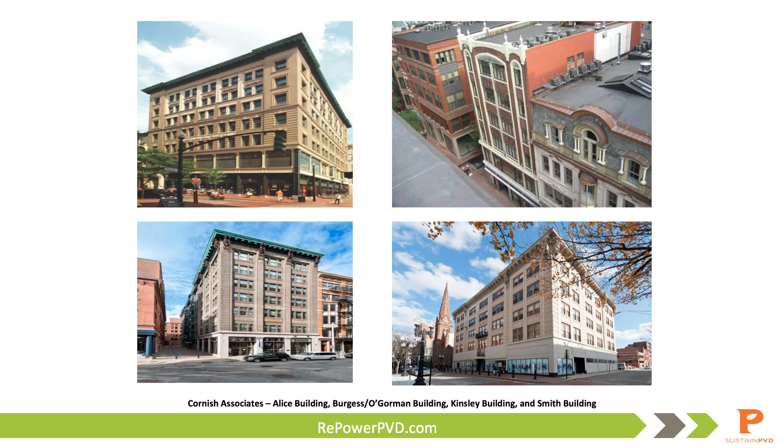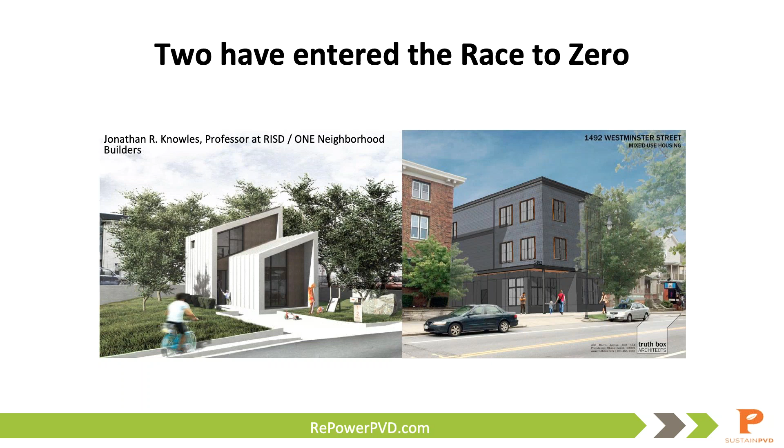So far, there are 2 participants who have entered the Race to Zero track of the challenge. One is Jonathan Knowles, professor at RISD, and the second is Truth Box, whose founder is Peter Case.

I also wanted to share that last year we worked with various stakeholders and co-created a draft ordinance called the Building Energy Reporting Ordinance, otherwise known as BERO. We plan to introduce this ordinance in the first quarter of next year. If approved, it will require all owners of buildings equal to or greater than 10,000 square feet to benchmark their energy and water use, using EPA's Energy Star Portfolio Manager tool, and then submit that data to the city of Providence. After that, the city will publish all of that information on its website.

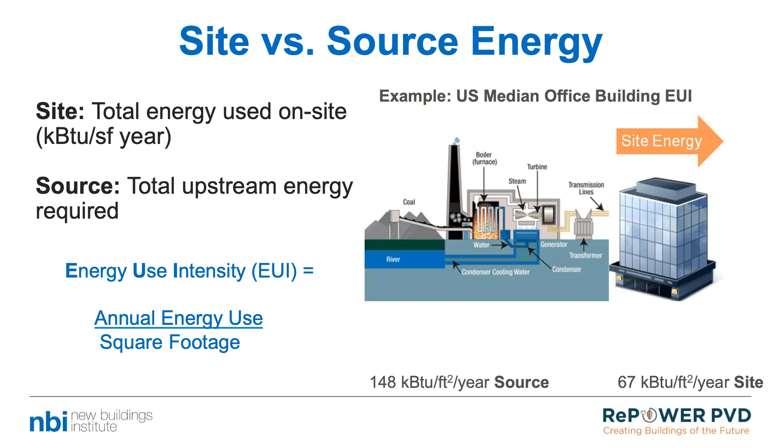But I think it's useful to think of zero energy in just more basic and general terms. A zero energy building is an ultra-efficient building that generates as much energy as it consumes on a net annual basis. A simple way to think about it. And you can get into the specifics when you're actually trying to reach a goal for someone else.

So if you want to reach the goals in Providence, you heard how they were defining that - a simple site zero energy requirement. But if you're seeking zero energy from a different certification, like living building or somewhere else, it's important to pay attention to how they're actually defining zero energy.

So with that basic understanding, I think it's a good idea for us to look at the growth of zero energy, because zero energy has moved from being just the bleeding edge of technology and building construction to really approaching almost a new normal. It's in the mainstream now. It's very achievable, achievable with off-the-shelf components, and we can see the growth just since 2012.

NBI has a report we put out called the Getting to Zero status report, and we've been putting it out about every two years, and you can see the growth in what we've found around the country. We're seeing zero energy buildings in every part of the country. There are just a couple of states that don't have them all, but it's important to notice this is not something that's geographically limited to a few places, and especially not limited to only a few climate zones.

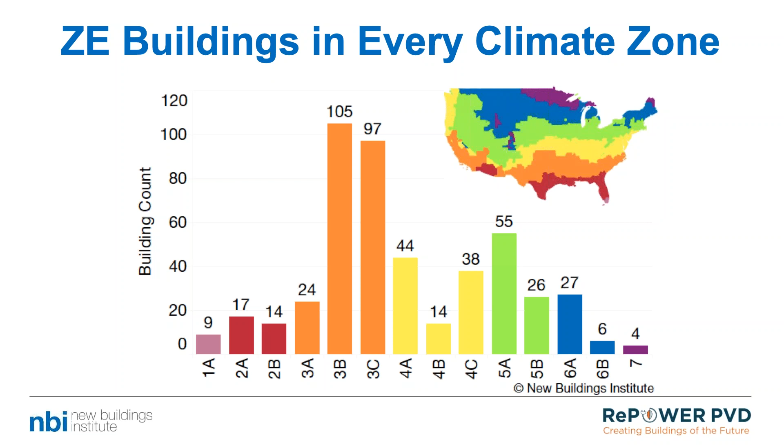We see that we have zero energy buildings in all of the climate zones in the continental United States, even climate zone 7, our most extreme cold, and climate zone 1, our most extreme hot climates. So we have examples of zero energy buildings being achieved in every climate in the country.

And not only that, we're seeing it happen under every kind of ownership type. In the very beginning, we saw zero energy buildings were kind of limited to owner-occupied buildings, where all of those details of how you do building construction and operation are simpler. But now we're seeing that zero energy is being achieved in all kinds of buildings. Of course, private for-profit is still the biggest sector, but public buildings - whether that's county, city, state, or federal - we're also seeing private nonprofit and private multifamily.

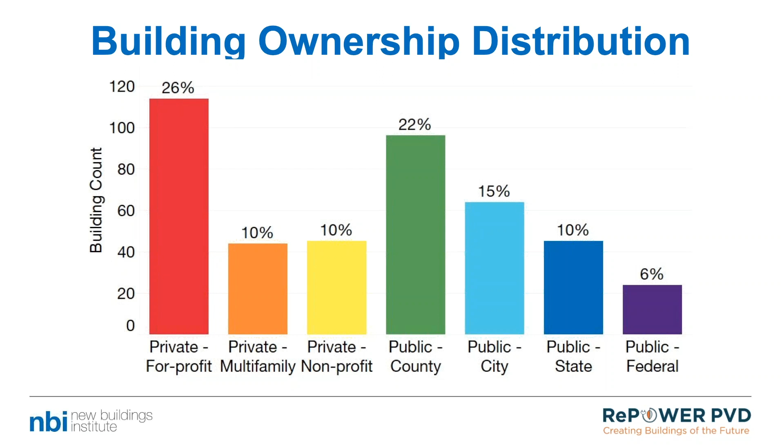There was a time when a lot of people thought that multifamily was not going to be a building type that we could get to zero energy, but it's actually one of the fastest growing building types today. And we're seeing it in lots of different sizes of buildings.

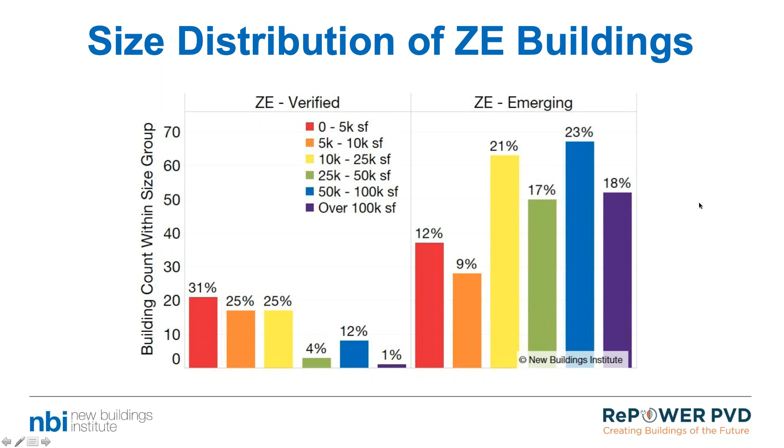Now, when you're thinking about that consumption side of zero energy, remember zero energy is where you balance consumption with on-site renewable production. So you have to bring down that consumption first.

If we're going to compare the typical consumption of a zero energy building, because we've looked at a whole lot of them in our Getting to Zero status report, what we're seeing is that it still requires a pretty big reduction from where the codes are. The codes really aren't close to the level of performance that you need for zero energy.

And to a certain extent, that really makes sense. If you think about it, the code defines the worst building that you can legally make. So zero energy is really a higher standard of building our buildings.

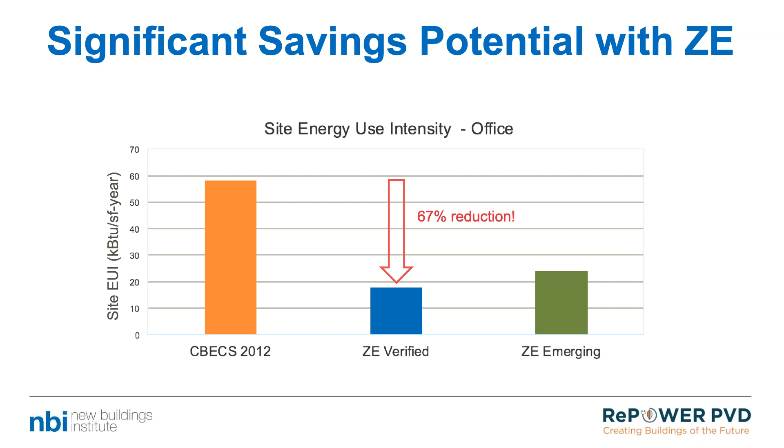So a 67% reduction, just in this example for office—if you look at this chart, it's not from codes, it's actually from the average performance of an office building from CBECS, the Commercial Buildings Energy Consumption Survey from the EIA. So we're seeing a real performance premium over your typical average building.

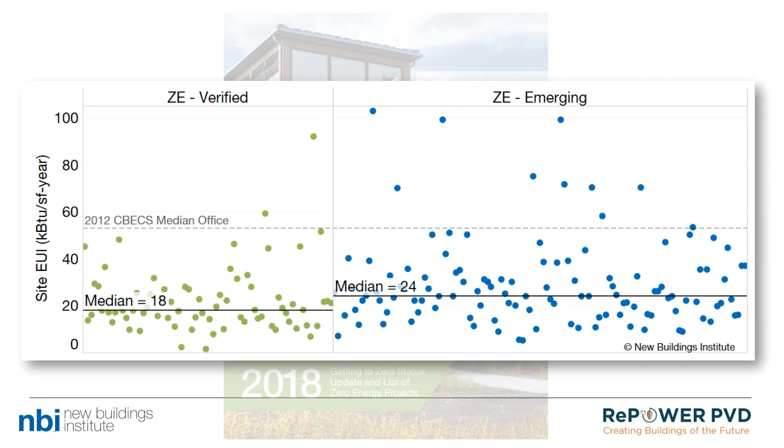So as you're taking on projects, this gives you a rough idea of where to begin. And just for reference, I talked about code a moment ago. The 2018 IECC—Rhode Island is an IECC state—delivers, on average, an EUI somewhere around 50. So there is still a long way to go, even in new construction.

And of course, we like to show and talk about what are the projects that are leading the way. Schools are really a big leader in zero energy. I talked about how multifamily is the fastest growth, but really it has been schools for quite a while now, and schools are the ones where we're seeing the greatest penetration in zero energy buildings. That makes a lot of sense when you think about it, because schools have budgets and they need to keep their operating costs under control, not just their construction costs. So there's an automatic incentivization to think about what are going to be the life cycle costs of those buildings.

So let's ask the question of why you might pursue a path to zero, because the energy is, of course, an obvious reason, but there are also a lot of non-energy benefits to high performance buildings.

Now, this is that classic 3-30-300 breakdown: if your energy costs for a building, say an office building, are about $3 per square foot, your rent might be around $30 per square foot, but for a building that's in use, your salaries and operations are going to be more like $300 per square foot. So we see energy, rent, and payroll.

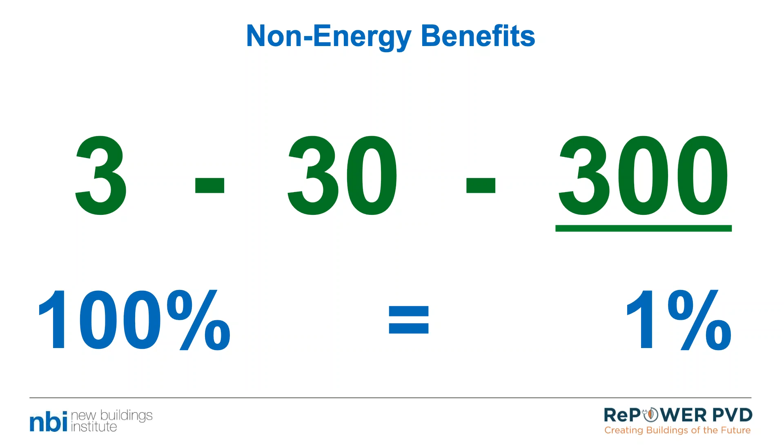And so the energy cost in a building can really be dwarfed by what a business is paying the people who are in the building. So you could reduce 100% of your energy costs, and that would only be equivalent to making a 1% savings in your payroll costs—which is one of the reasons it makes a lot of sense to look at the non-energy benefits of high performance buildings, because they have impact not just on the energy costs, but also on the people.

This chart takes a look at some of those economic impacts, looking beyond what just energy and energy efficiency does. Go ahead and take a look at it—it actually comes from where NBI is located, Oregon.

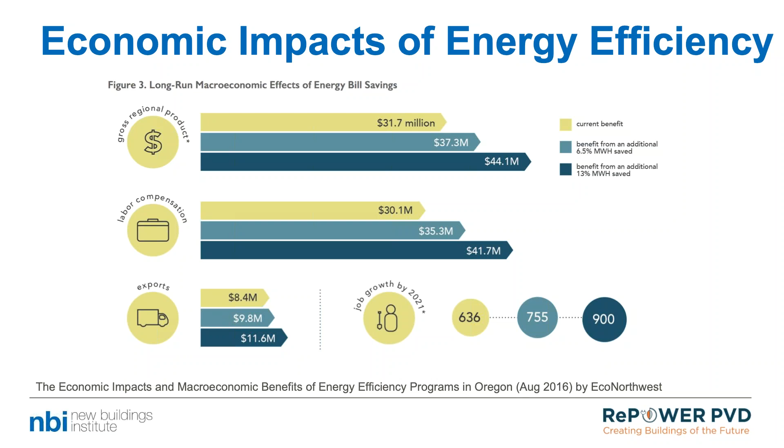There's a lot of information here, but the key takeaway is that with an increase in energy efficiency adoption, we see more energy efficient products—lamps, panels—being produced, bought, and installed. And that has a real economic benefit to the locality.

But we were talking about the payroll and that impact on the actual building itself. In high performance buildings, we've seen not just reductions in energy, but also improvements in occupant well-being, satisfaction, and—most importantly for economics—productivity. So there is a financial benefit: you can get more productivity out of healthier and happier occupants, which can have a much larger economic impact on a building than just the energy savings.

So how do those health benefits really shake out?

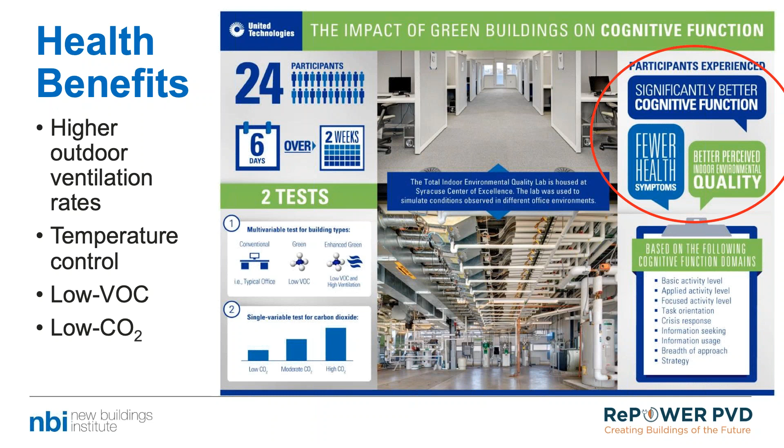With better ventilation rates, better temperature controls, and better control of VOCs and CO2, you see lower absenteeism, better attention to detail, and even higher cognitive ability, especially as CO2 levels are dropped down. Many studies have shown that these impacts affect especially office workers.

So we see there is a benefit to the environment of going green, but companies can also save money by occupying green buildings. Employees generally prefer green buildings, and even a building's asset value can increase the greener and healthier it is. This is something we've seen consistently, studied in LEED buildings, that the actual valuation of buildings is impacted by whether or not it has these green certifications.

So I mentioned schools before, how schools are leading the way. I'd like to talk briefly about why you would want to go to zero energy in schools specifically. There's cost avoidance from utility bills to the classroom, an ongoing cost savings to the school owner, usually the school district.

It's a more comfortable and productive environment for teachers and students. If you think about it, a school's job is to educate the students, and this actually makes the school better able to do its job, to serve the purpose for which it was built. By building inefficient schools without the same kind of indoor environmental quality, we're actually building an asset that doesn't do what it's intended to do as well.

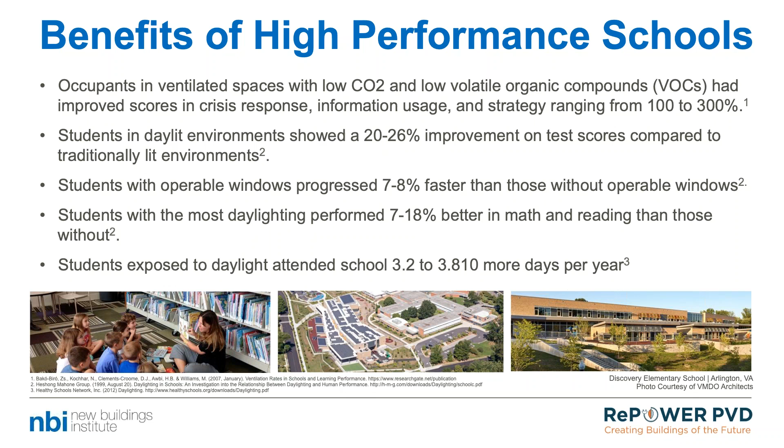So for those of you who are my age, during the era when they were getting rid of windows in schools because they were quote-unquote distracting—these schools that have view windows and access to daylight and views, these hallmarks of high performance schools, are actually resulting in better test score performance out of students.

So by having healthy schools, we can actually have a real impact on the overall health of our childhood population.

So we've talked about zero energy in general, zero energy buildings and their characteristics, and other benefits. So how do you get there? What we found by looking at buildings is that there are a lot of ways to get to zero energy buildings, but a few common strategies and technologies keep popping up.

They keep being part of that successful mix. What we're seeing is stakeholder awareness, especially when dealing with public projects, and team selection that is cognizant of making sure the team has the right skills to get to zero. A good integrated design and pre-design process so that zero is integrated from the beginning, and energy concerns are brought forward in the design process so they can be effectively handled.

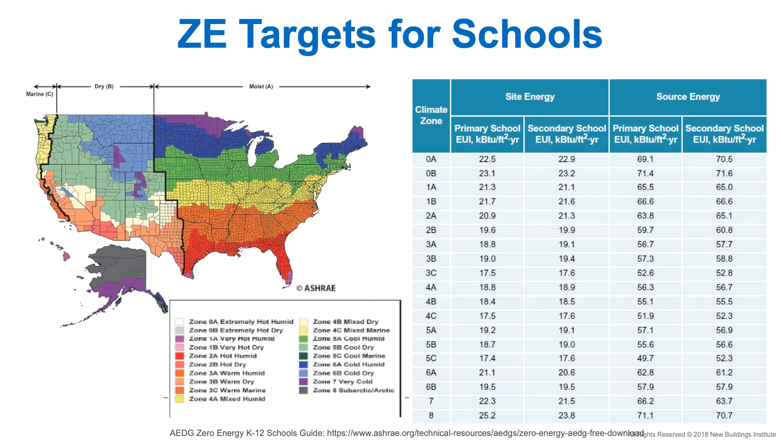Now I wanted to talk about existing buildings specifically, because building prioritization is one of the strategies I mentioned before. If you are looking to get to deep energy savings in existing buildings, or even going all the way to zero, you really have a process you need to follow. That starts with benchmarking, what Dilip was talking about. In Providence, they're doing this on a voluntary basis now, looking to make it required in the future. That's an essential part—you have to understand where the building's performance is.

There are lots of useful tools out there. You can use just your energy bills that come from the local utility, and you can use tools like Energy Star Portfolio Manager—you might as well get used to it now—or other online data tracking tools to see how the building is actually performing now.

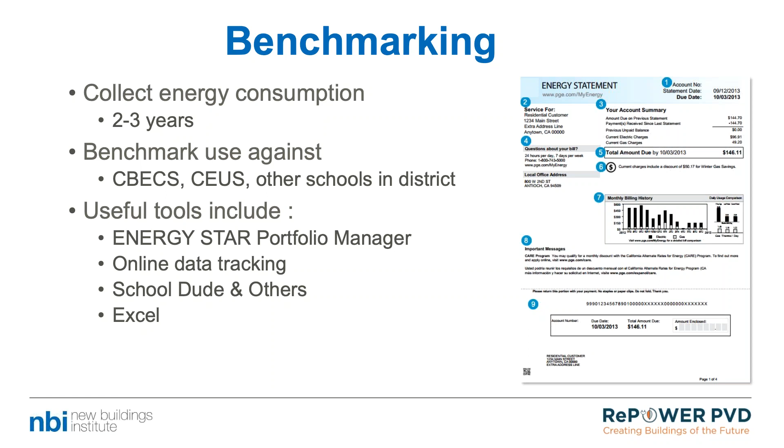But if you want to see if this building is a good candidate for zero energy, it takes more than just understanding where it is. It takes an understanding of why it's where it is. That depends on investment and assessment—looking at the building's physical characteristics. What is its envelope like? What is its structural system like? What is its electrical system like? Identify not just the weaknesses, but also the strengths in these existing systems.

It takes looking at the site itself so you can see if there are opportunities. Your climate is not just a negative, it can be a positive. Are there natural ventilation opportunities? Are there natural daylighting or passive solar opportunities? And of course, talking to the people who use the buildings themselves—not just the facilities managers and operators, but also the occupants, so you can understand how it's actually operating day to day.

When you're thinking about whether a building is a good candidate for going from where it is to zero energy, I think it makes sense to think about the way a building exists—this isn't a new building, we're not just starting from scratch. There are really opportunities in a building's life. Every building has a life cycle, and those life cycles provide opportunities to make energy efficiency improvements, including going all the way to zero energy.

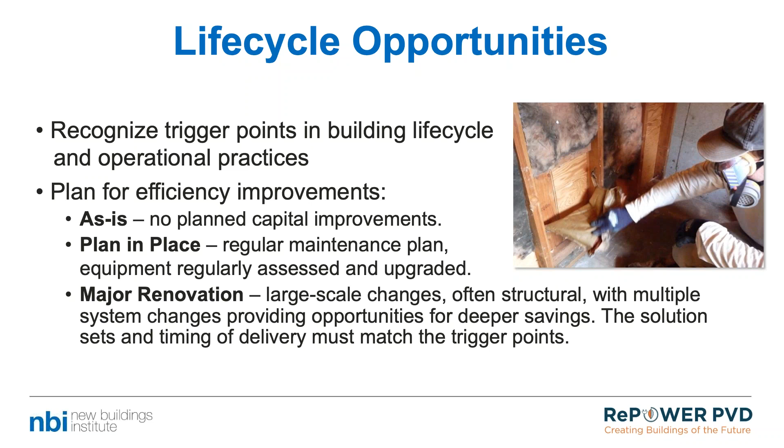And that requires having a plan—looking at whether you're just going to leave it as is, and sometimes that makes the most sense because the time isn't right. You can plan in place, making general improvements to it as is, so that as the building goes through its natural life cycle, you can address things as they come up. Or you can take a more serious approach, a major renovation, where you make large scale changes all at once, providing a real opportunity to make significant changes. And I like to look at it this way.

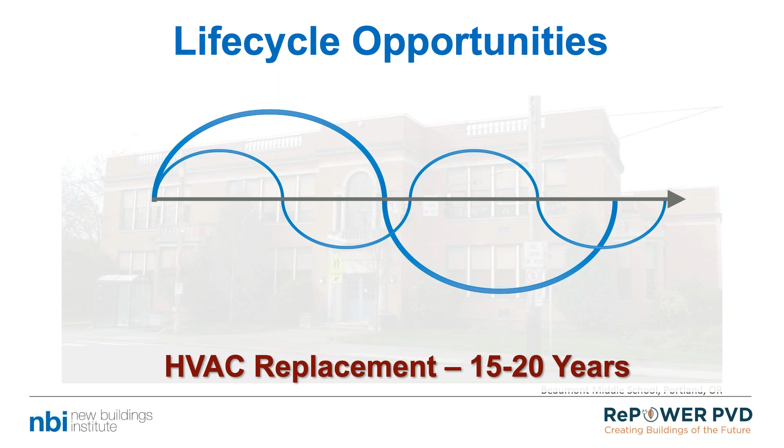You get that major renovation chance maybe every 30 to 50 years. But more often you're going to get an HVAC replacement - that happens every 15 to 20 years, and that's a major opportunity to make changes in the building. Your lighting retrofit might be every 5 to 7 years in an office. In an office, your lease renewal might be every 2 to 5 years, and that's another opportunity to make energy efficiency improvements.

And of course, real estate transactions. One of the reasons real estate transactions create such an opportunity is because that's when money is involved. There's refinancing, there's mortgages. These kinds of transactions create an opportunity to bring capital in to make these improvements. And that could include smaller transactions, whether like the leases we talked about before, or refinancing.

Part of looking at these economics, with zero energy, is really taking the total life cycle costs of owning and operating a building and moving them forward. The utility costs you would have paid over time - you're avoiding some of that by building a better building up front. High performance buildings have been found to have lower maintenance and repair costs, so that ongoing maintenance and repair, you're avoiding some of that later on. All buildings need some maintenance at least, and by building better value up front...

If you think of a zero energy building in terms of the net present value of all these characteristics you're creating in a building, that justifies any additional cost there might be for going to high performance. It makes that incremental cost analysis work better.

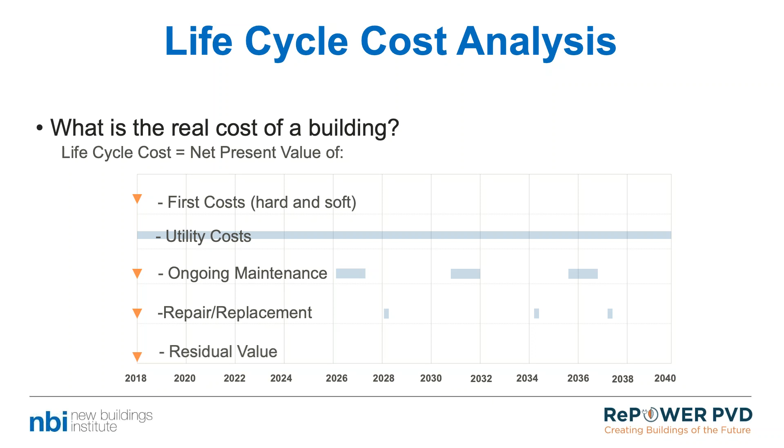So we've talked about existing buildings, that assessment and thinking about how you get in there. Now we'd like to talk about how you move forward with your design process. We mentioned early on that one of those strategies was the integrated design process. There are formal integrated design processes out there, but we want to talk about it more generally, whether or not you're following one of those formal processes - what you want to do is bring that expertise into the project early. One great way to do that is with a zero energy design charrette.

Of course, getting everyone to agree on the energy target and sustainability goals, get everyone to buy in, and then brainstorm the potential technologies and strategies to achieve the target. One of the reasons you want to bring this team together early on is so you can identify pitfalls that are oftentimes not identified until later.

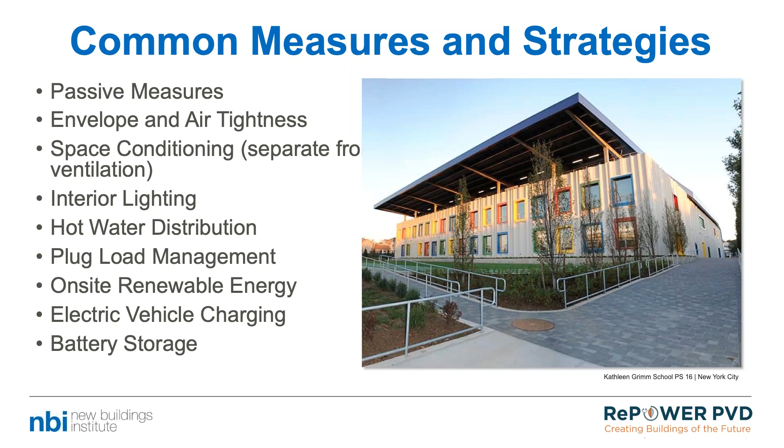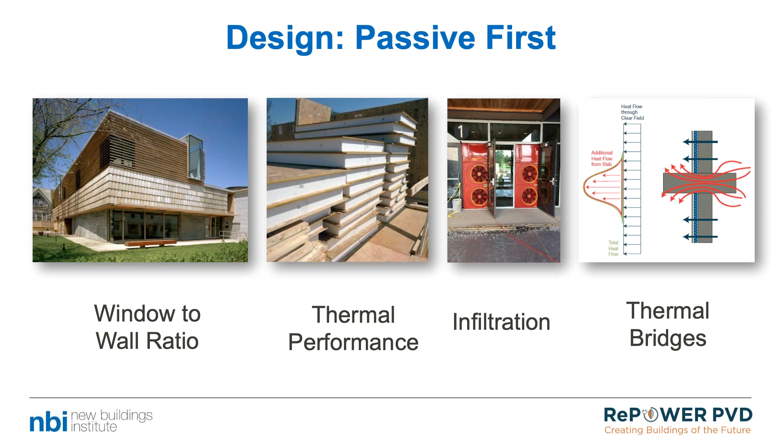So when we look at passive first, we're really talking about a high performance envelope, and that includes things like window to wall ratio, the thermal performance of the materials themselves—both insulation and windows. Taking care of infiltration and reducing infiltration levels, which is also key to indoor environmental quality. And then also addressing something that is often under-addressed, which is thermal bridges—these high conductive materials that pass through the envelope that act as a shortcut for heat to get in and out of the buildings.

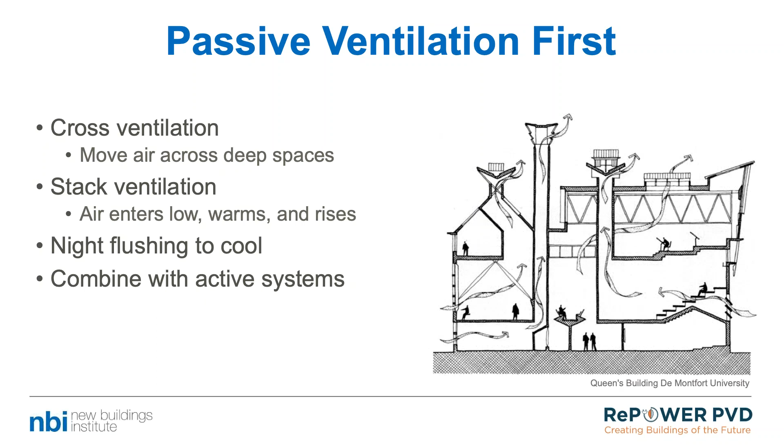But it can also mean more sophisticated approaches like passive ventilation, looking at the opportunities for cross ventilation, where air moves across the space, or stack ventilation, where cool air comes in low, and as it heats, it exits high. I think one of the big ones is really night flushing, because that is a real opportunity to cool down buildings before the day even starts. And these can be integrated with active systems so that you don't have to go all the way to natural ventilation all the time.

Looking at your shading opportunities, to reduce the amount of solar gains that get in, to reflect the light around so that you're just getting the daylighting and you're not getting as much of those solar gains through the windows that you have. That's kind of always the mixed bag about windows—yes, you let in the light and you've got daylighting, but you're also letting the heat in and out of the buildings.

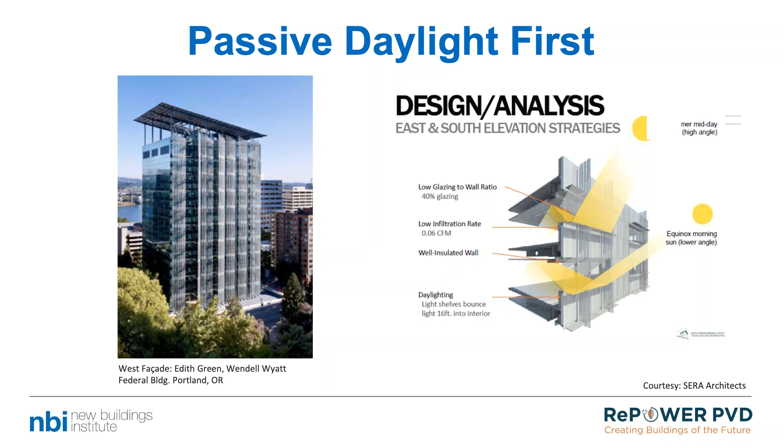Daylighting is really a big one, and that's one that should be part of every high performance building—designing your windows so that they effectively bring lighting into buildings. And even now, even with higher efficiency lighting technologies, lighting is still a major use, especially in office environments. Of course, daylighting allows you to reduce or eliminate the electric lighting that you use in the space.

But at the same time, you have to be cognizant that a good daylighting design is going to have impact on the spaces and how they're laid out. It's going to mean less walls. You may not have those private offices all around the perimeter of your office building, and it has to be controlled. Lots of windows doesn't mean that you have a daylit building.

A daylit building has carefully selected windows that let in enough light, but don't let in too much light so that you don't get glare, but also let in light in a way that penetrates the building as deeply as possible, using things like light shelves, exterior shades, and interior shades. And of course, even surface color and texture has an impact on daylighting, so having highly effective daylighting systems can have an impact on the aesthetics that you choose for the building.

So moving beyond passive, we talked about interior lighting, and we're really to the point now where LED is the way to go. The color quality is there. They can look like standard light fixtures, and they also provide some interesting opportunities to design atypical lighting, which can be a benefit in and of itself.

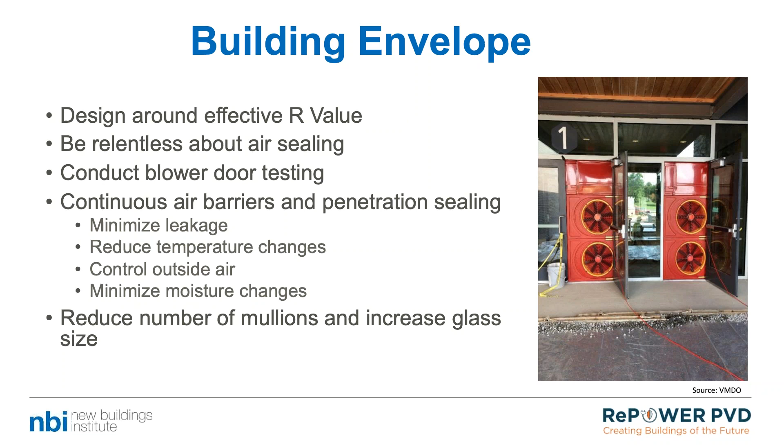That's one of the ways that you get a higher performing glass fenestration system. But of course, the other part of that is the space conditioning. You really have to look at high efficiency systems, but more than just high efficiency systems.

What the system is rated at is of course really important, but there are some system types that are just more efficient than others. So look at selecting those types like VRF, like high performance multi and mini split systems, like ground source heat pumps, like radiant systems. These systems are frequently found in zero energy buildings because they are more effective at conditioning the space for the amount of energy than other systems, even when they have the same efficiency rating.

But then, looking beyond just the space conditioning and looking at ventilation and the opportunities to do heat recovery. Of course, air tightness is a part of this, because part of sizing your HVAC system is accounting for the loss through infiltration. If you have VAV, looking at AC just for dehumidification.

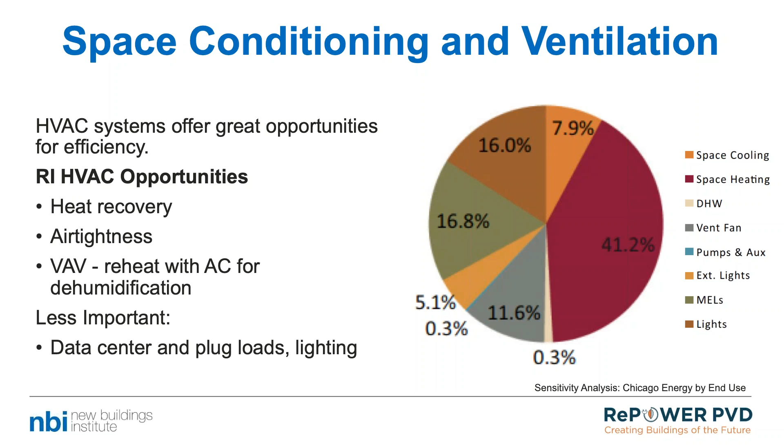And then, of course, the impact of things like data centers and plug loads and lighting, because if you can actually bring those down, you can bring down your space conditioning loads as well. But one of the things that we're seeing in a lot of these buildings is high performance ventilation.

Now, one of the really big examples of this is decoupling ventilation and space conditioning. So a dedicated outdoor air system can provide the ventilation all on its own. Most HVAC systems that are sized for space conditioning are oversized for ventilation. And so when they're only providing ventilation, they're actually doing it very inefficiently.

And so there's the opportunity to decouple the two so that you can have ventilation being very efficiently provided, separate from the space conditioning system.

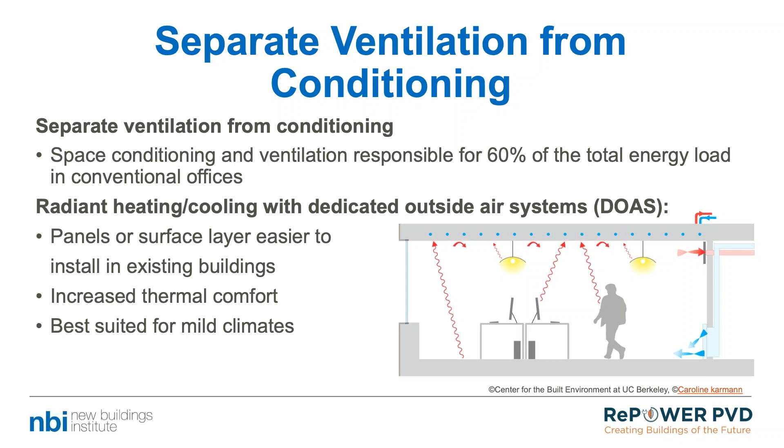And of course, this is a natural link with approaches like VRF that we talked about, or what you see here, the radiant heating and cooling, which is a great application of DOAS, where the radiant panels are a very easy way to get radiant heating and cooling into a space. They can improve thermal comfort, and they're really well suited for mild climates, but they also work in more extreme climates as well.

Now, looking beyond space conditioning, there's the other kind of equipment, which is your hot water production. Now, in a lot of commercial buildings, this is usually either a very small load or a very large load, because there's a big process load or because it's a multifamily building.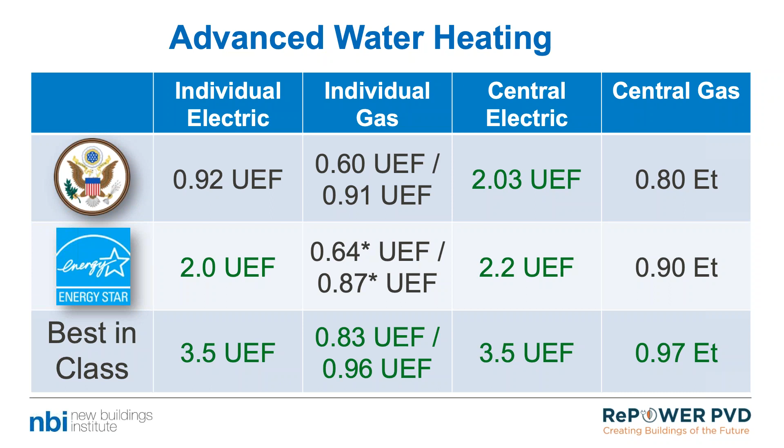And you can see how far Energy Star is beyond these code minimums that are set at the federal level. But even the best in class goes quite a bit beyond that. So there's big advances that can be made.

And of course, this is a great example of where your local utility, and this is something that I want to highlight in general, is that your local utility, this is an example of National Grid, can really help with these sorts of technologies and getting them into your building. So not just for water heaters, but on all kinds of equipment that goes into the building, and even technical assistance.

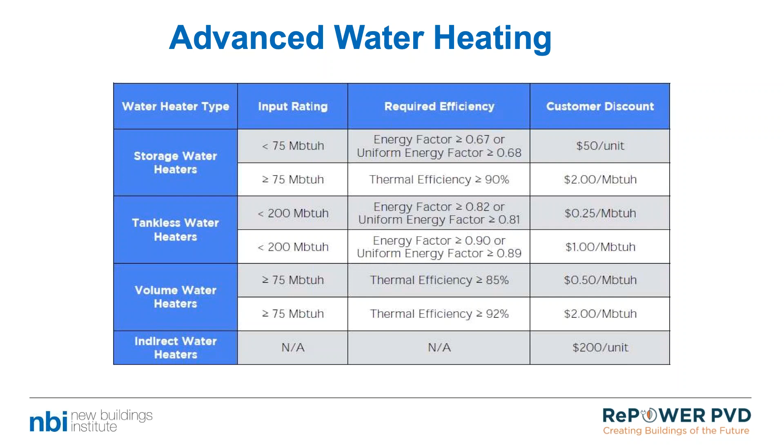And we talked a little bit about controls and about how important it is for it to be very user-friendly, very intuitive. But we also have to have that local control, and you need to have the consistency. The usability of controls is one of the most important things. And that can be achieved at a very high level with sophisticated building automated systems, BAS systems, EMS systems that can really tightly integrate everything.

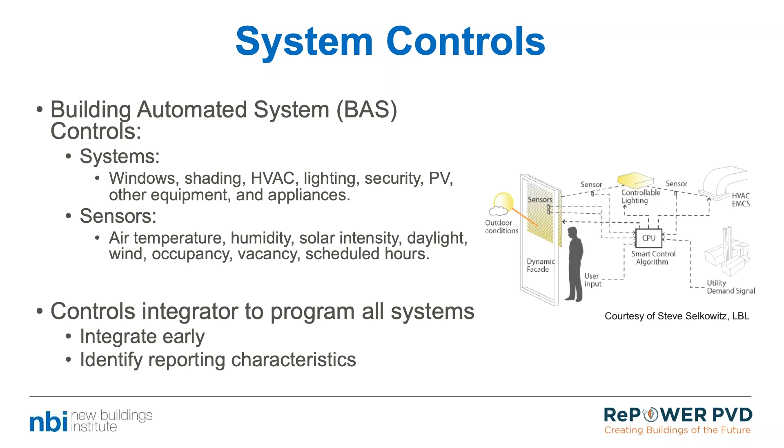And when you have a larger building, that can be a really effective way to make sure that all of the systems are working well together. But controls go beyond just the equipment.

That is also an important way to address plug loads. As we bring down all of those other loads in a building, plug loads are becoming larger and larger, so that in a lot of zero energy buildings, plug loads can be as much as 50% of the total energy use. So there are opportunities to bring down those loads by actually controlling the receptacles that non-essential plug loads are plugged into. There's also the opportunity through equipment selection, policies, and the ongoing operations of the building to bring down the amount of loads brought into the building to start with.

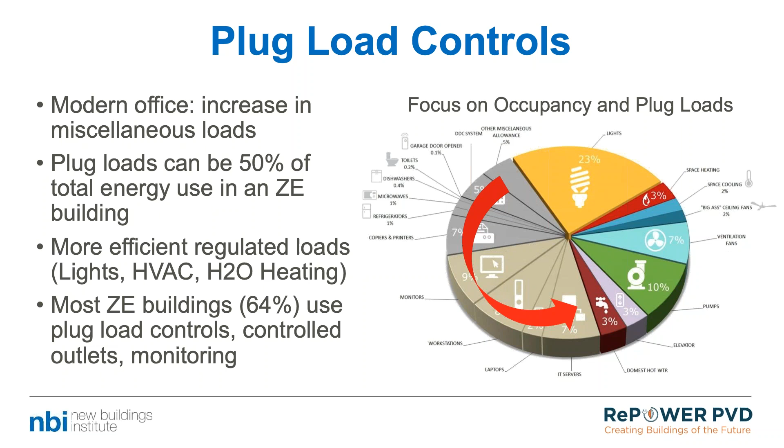So that's one of those important things about bridging to operations. Plug loads are one of the most essential places where that needs to happen. Which gets us to operations in general: you need a feedback mechanism to the operators and occupants so they can see how the building's doing, see the impacts of their behaviors, and make adjustments, so you can foster a little competition and goal-seeking. That feedback to the occupants is a really important part of getting to zero.

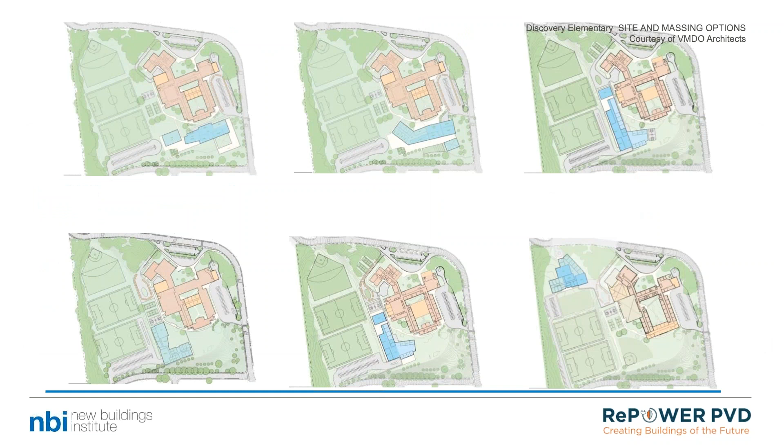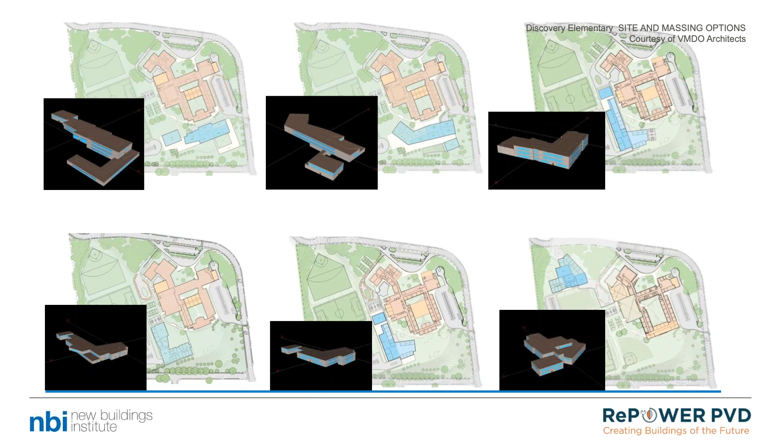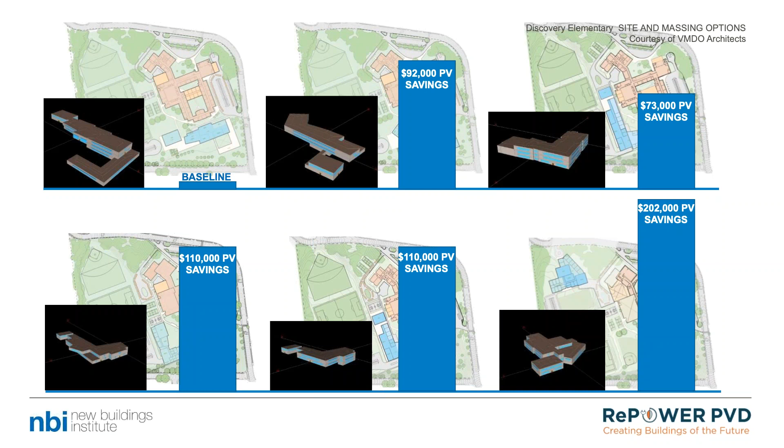I wanted to talk briefly about the impact of consumption on renewable production. Here is a school design where they looked at different ways to put the school together and how that impacted consumption, and therefore how much renewables they had to put on it. By saving energy in the design, they were also saving cost in the size of the PV system needed to achieve zero energy. This is why you really have to look at the energy efficiency side first - PV is sexy, everyone's focused on renewable energy, but really the efficiency comes first.

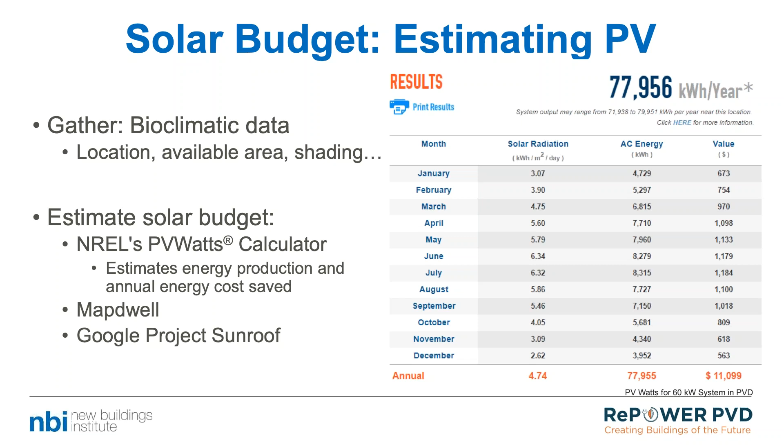There are lots of ways you can estimate how much energy you can get out of your site and your roof. Here's just one tool, NREL's PV Watts calculator. It's important to understand how much renewable energy you can actually generate on site.

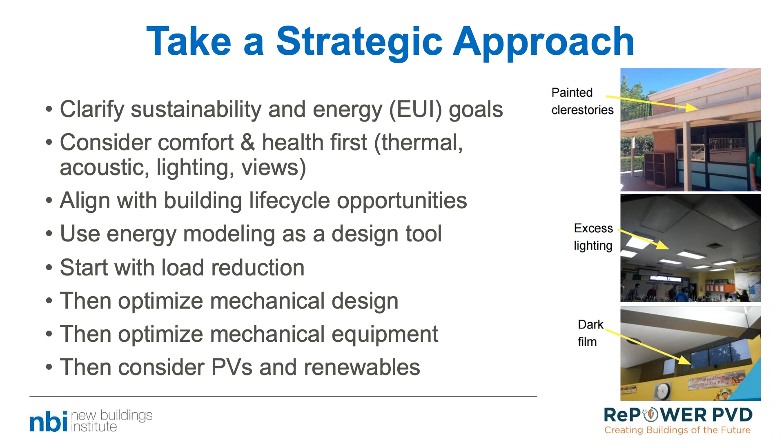So really this comes down to taking a strategic approach. You have to have that goal clear from the very beginning, and go through all of these considerations: consider comfort and health, consider your life cycle opportunities, use your energy modeling as a design tool, not just a specification tool. Really begin with load reduction and then optimize all of your mechanical systems - load reduction through passive strategies, then optimize active systems like space conditioning, ventilation, lighting, hot water - and then you get to PV at the end.

There are a lot of resources out there, many put out by NBI, but also from other sources - look at those. You're not bushwhackers here; you don't have to carve the path yourself. There are a lot of places you can look for guidance on how to achieve these goals, and a lot of examples of other people who have done it. We have case studies available online for you to look at. You can follow that well-trod path that others have walked before you. There's a registry and database where you can look at other buildings and see how they got to zero energy, so you can get there too.

So that ends my part. We've got some time left for questions, especially if you thought of any questions as I was talking that you wanted to ask Dilip - now is a good time for that as well.